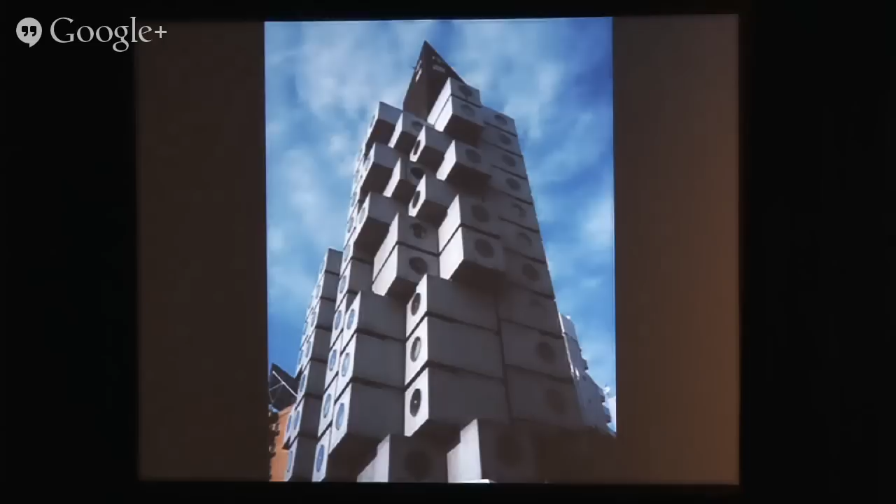Also in terms of design, this is the design of the 60s in Japan. It's very edgy - sense of gravity, sense of edge, sense of color, sense of material. This is one of the mainstream architectures in Japan now after such a long crisis. People in the world see this as a kind of exotic architecture, but I see it as part of the outcome of a long-term recession.

But because I was doomed to live with a downturn, I actually investigated a lot the potential of the post-crisis. In short, I did a lot of investigations at universities, and in short, when the economic indexes go down, instead the human feelings index goes up. So: planning, connecting, thinking, feeling.

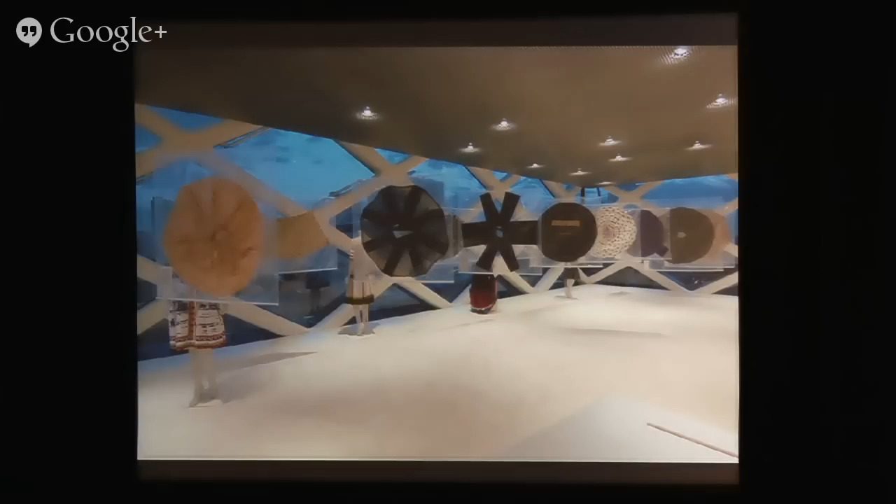For example, this is a group where we vacuum-packed the skirt, which has an interesting plan - a skirt you always see in elevation, but here it's in plan. Also, since it was a traveling exhibition, this vacuum-packed skirt could easily travel to the next venue.

These were the skirts that had a really three-dimensional cut or hard fabric, so they stood without any support. So we showed them as a kind of sculpture piece.

And this was showing the movement of the skirt with some kind of device - we used a ceiling fan motor to rotate the skirt in the building. Again, we used the mirror here to see the underside of the skirt and put the explanation of the skirt on the mirror, so you don't have to hesitate to look at the underside of the skirt, because you can read the text.

So this shows how it rotated - you can see that with different speeds and different heaviness of fabric, there is a different rotational speed.

We also use a car wiper motor on a battery, so it's not connected to any wire, and hang them on a skirt. This was a skirt that had an interesting sound when you wore it. People were wondering how it was moving, and without hesitation you could see by looking underside of the skirt. I have to say the entire team that did this exhibition design was all guys, so there were some pervert moments.

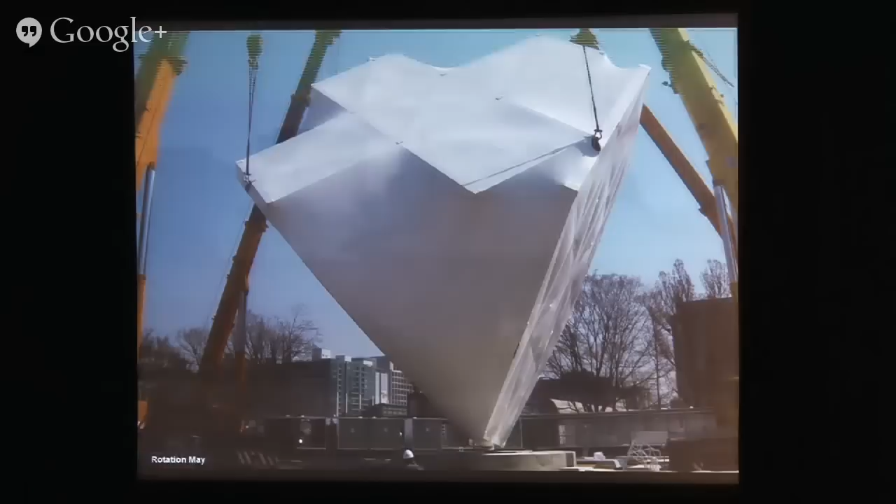Then we did this exhibition, a pavilion called Transformer in Seoul, South Korea, which consists of 4 different shapes put together into one triangular pyramid. It's a very complex shape connected by membrane that rotates each time the event changes.

Because this was the first exhibition and we wanted to communicate that in the future this object will rotate, and what you see as a wall and ceiling will become the floor, we decided to have these mannequins walking on those future surfaces like this. It's a simple idea which we thought was good, but of course to make that happen it was a huge deal to put them up.

So these are the scaffolding just to put them all up, and all the guys carrying legs, putting them one by one, mounting them onto the steel. It was supposed to be such an easy installation, but it became one of the biggest moments inside. It went overnight, of course. This was one of the most beautiful moments actually in the whole exhibition.

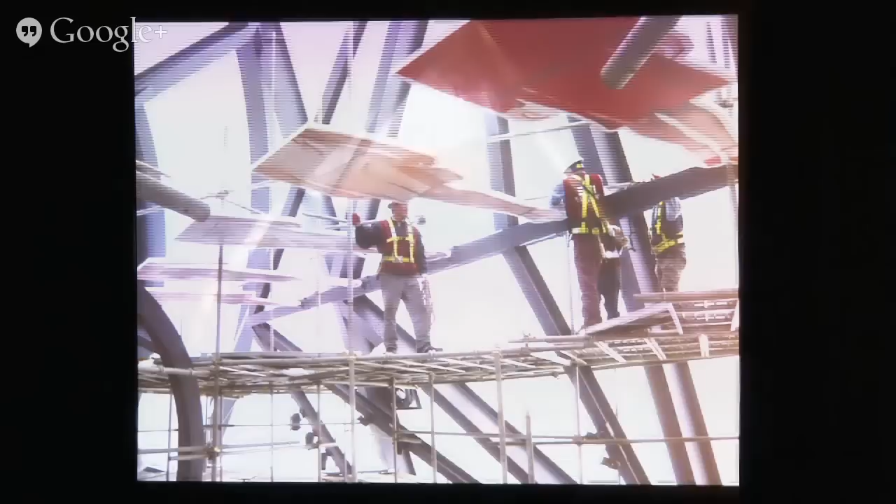We also do a lot of fashion related contributions, and one of which is also dealing with a denim brand, as you might know, Raleigh Denim, run by this very nice couple, probably younger than I am, though I never asked their age, definitely younger. It's quite important for architects, I think, to work with the same generation or younger, because in a bigger project you tend to always work with a much higher age, and you tend to forget what your generation is about.

It started through our collaborator Patrick Hopgood, who is also here, also from Raleigh, who knew them. They already had a shop in Raleigh, but wanted to open a store in New York. We went to their factory slash shop here in the factory district.

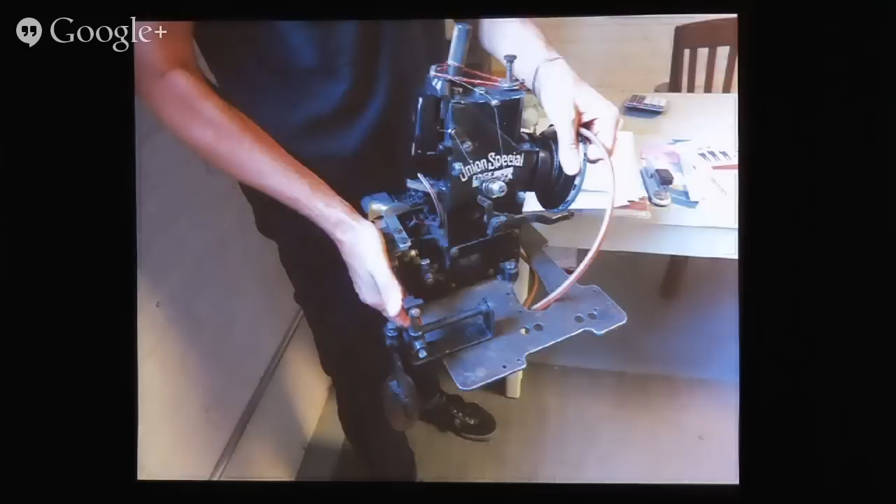They welcomed us with this kind of very subtle wall installation. This was the factory. As you might know, they use very authentic devices to sew. And this is their store, which was very charming. You could see that they are in constant change, thinking about every detail, every possible display as a communication. And this is their paper planes mounted on their ceiling.

What they wanted was a kind of hybrid of showroom in New York and also a store. And it's not just a denim store, it's also a curatorial store, so they also sell things that they like.

We thought the craft coming out of here was quite interesting, so we looked into the history of craft and how craft was always process based, and also always collective. We thought that the specialization of denim and the curation could be paired, and we had to compete against the typical denim store, which sells denim as the main foreground, and the curatorial shop, which is this kind of eclectic collection of displays. So we thought this workshop style and a Wunderkammer style could be merged, rightfully reflecting the culture of Raleigh and the location, which was in Nolita in New York.

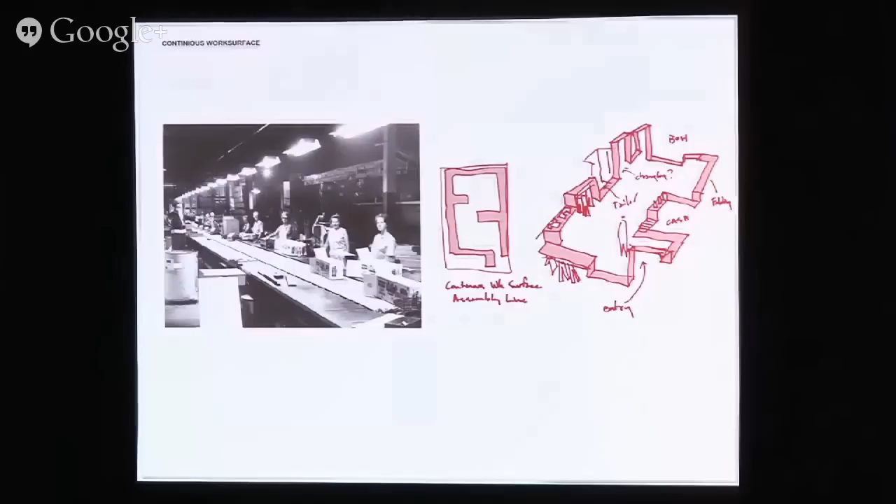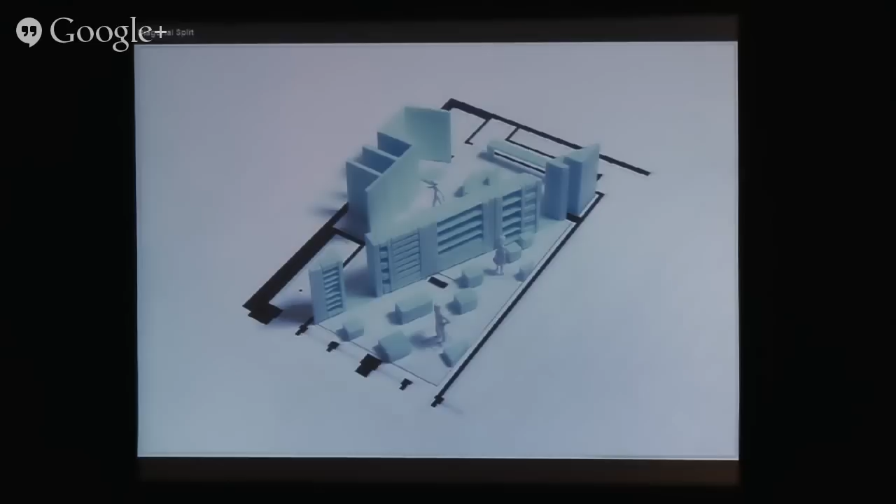I'll show you a couple of tests. This was like a continuous work table ribbon that creates a courtyard in the center. This was dividing the curatorial part and the denim part by a single wall.

This is literally dividing the open side, flexible side, and more defined side. This was dividing in a section, so in the front, the entire display is rising from 0 to higher, like a slope, and then in the front it's more flexible, and in the back it's more enclosed.

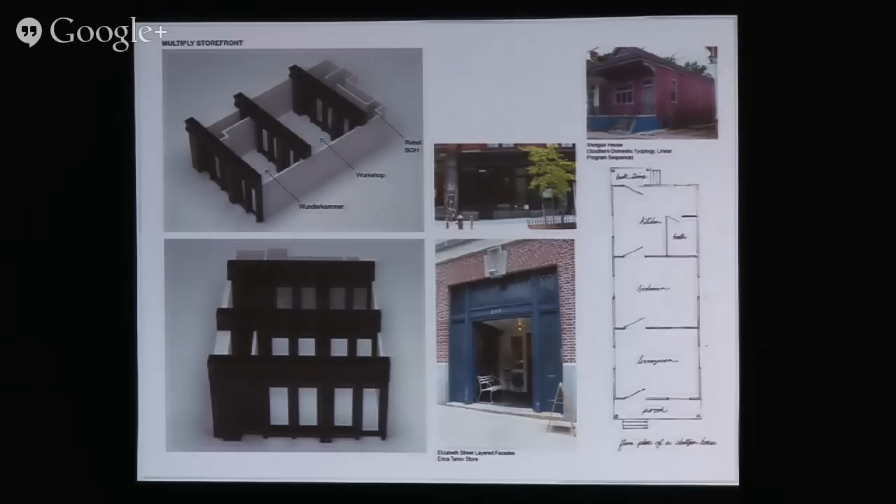We also thought that you can actually replicate the facade inside like 3 times, so that you don't know how long you are going into the store. So we did so many things, but which Patrick also worked on.

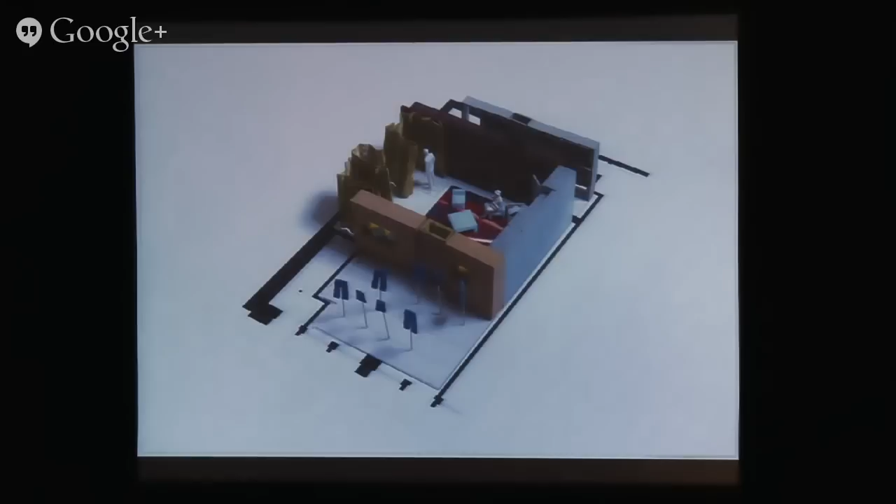And this was the kind of southern parlor room, which we thought could be an interesting feature. So it's not really a shop, but more like an entire store is a lounge, or the reception, like a hospitality lounge. So there's a hidden door behind the display that could open and be flexible for bigger events and so on. But ultimately, we chose the approach that we have been questioning on the fashion world.

So we thought this was strange that the density of the product actually represents the high end or low end. We thought that actually the most luxurious moment is that the owner can decide the density there and configure it themselves. So we started to think what can facilitate that kind of density change.

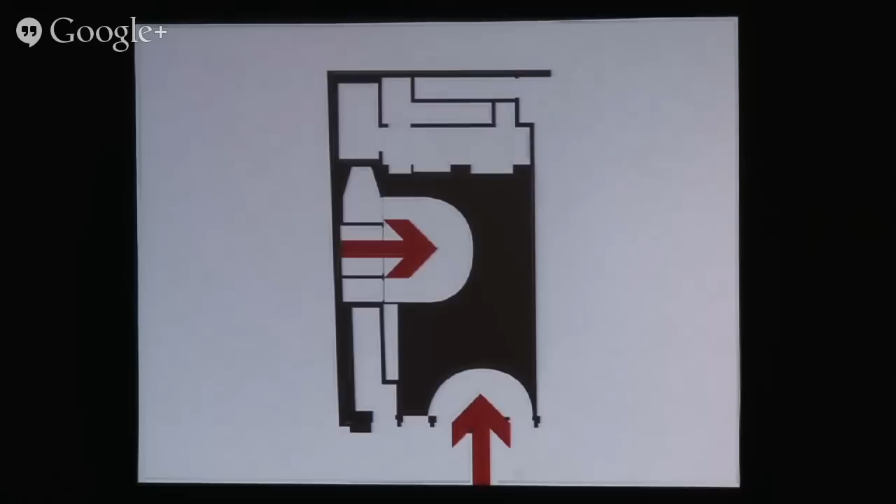And we immediately saw this kind of wireframe where you can actually have an armature that can carry many things, but also start to manipulate the transparency and density. So almost like an entire room filled with scaffolding. So what we did in the end is to create an entry hall, a parlor room, and a changing room in the back. And what you see as black is basically a wireframe space.

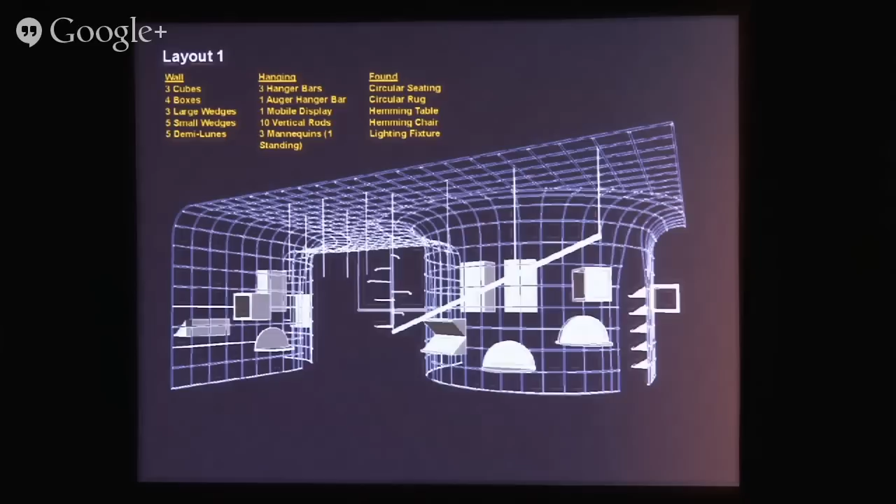Like this. So you see on the left is the entry hall, and on the right, the circular part is the parlor room. So you can hang many things, you can collect many things, and be completely flexible about the future.

You can have denim, basically clad the entire wireframe with denim, or you can have many different things, or you can create a wall, or you can do this kind of three-dimensional graffiti using the grid or media. So this was how it was finished. So you see the wireframe, and you see the product as the forefront of the room, not velvet cladding.

So everything is hung. And sometimes flexibility is a burden for lazy owners, and I understand that because I'm me too. But when we met Sarah and Victor, we thought we can rely on them to actually engage this potential and continuously change, because otherwise, providing flexibility could be in vain easily.

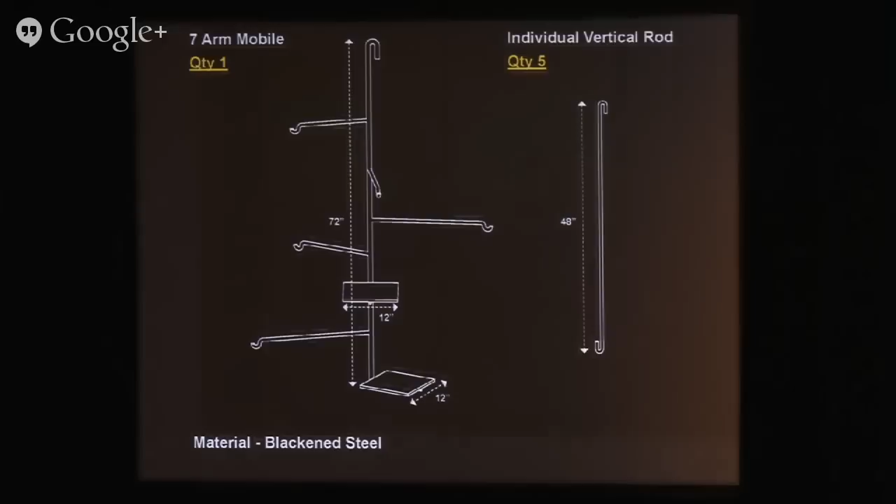So you can manipulate the density. You can sell only like 5 pairs of denim like this, or you can do the kind of family sale style like this. So we thought it was quite interesting to provide that possibility for the owner.

And as we predicted, they started to get bored with the first configuration. So they started to do something. This was the first attempt to actually close partially and create a kind of datum of opening.

I also think that at this level, architects are not any better than fashion people at actually designing the space. I think they have much better taste than architects. So we really wanted to create a space that is a complete collaboration, and we just provide the armature and they will just execute.

So they do many events still here, and they just changed recently again. So it's kind of working as we predicted. So these are the fashion projects, and now I would like to go into art. We do many art-related projects from institution to collaboration.

So for the first time, the museum became also a city museum, not just a park museum. What we did is to charge this moment where two entities are colliding, city and park, by basically peeling up the ground like this. You let the city come in and also the park continue and art extend at the same time. So it's not just the museum that's extending, all three entities extend at the same time.

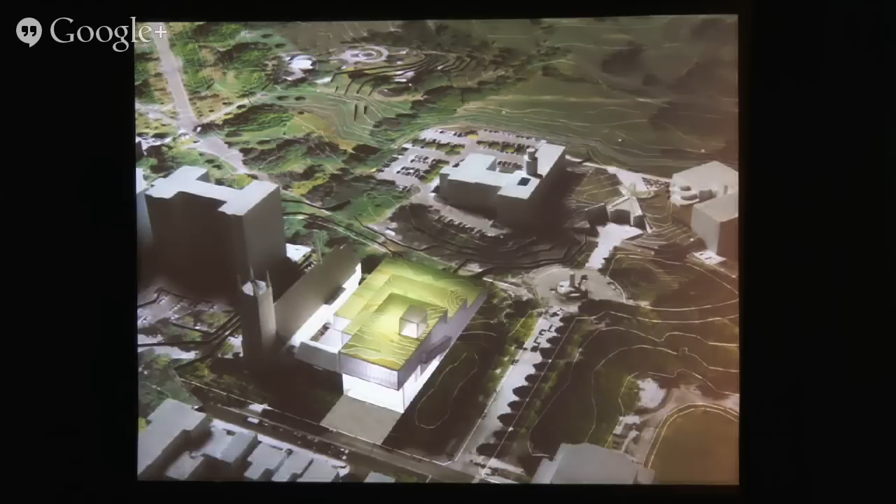So you can see that the topography of the park continues over the museum, and you see the city coming in and providing a big kind of entry hall for the entire museum complex.

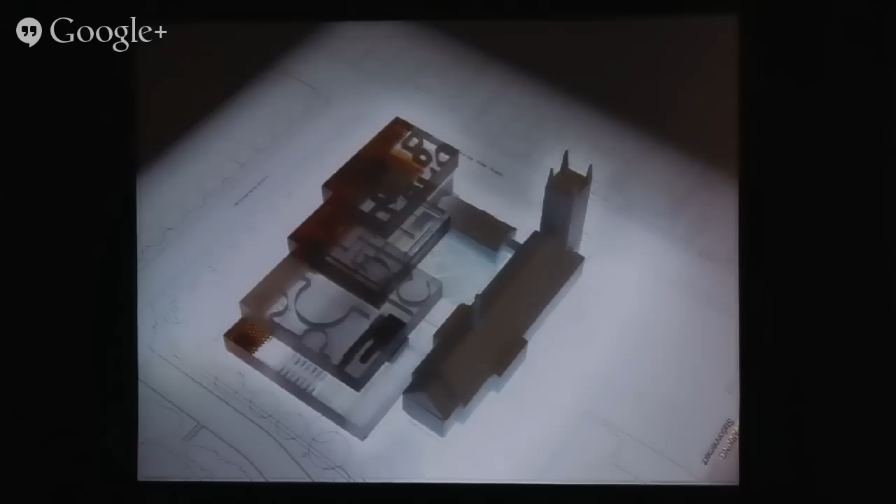The boxes are basically a straightforward translation of what they needed. It was next to the church, so it was stacked. From the city side, you see this kind of floating box. And this is a grand hall, which is a column-free space surrounded by many different programs.

In Canada, it's not entirely sustained by private donation like the US, so they have to raise their funds themselves. That means they often use the museum itself as a kind of event space to get the rent. So they organize so many different events on this level. It's almost like an event space with the museum on top.

So they do art events, or a wedding, or a performance, and so on.

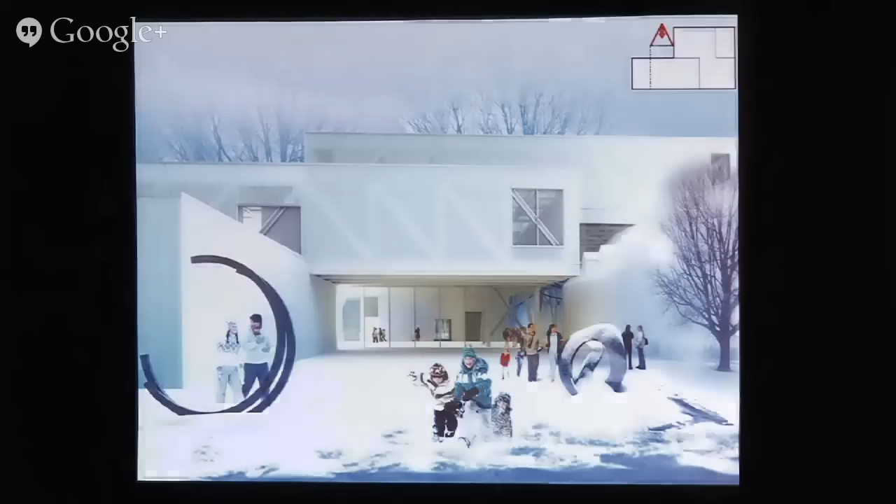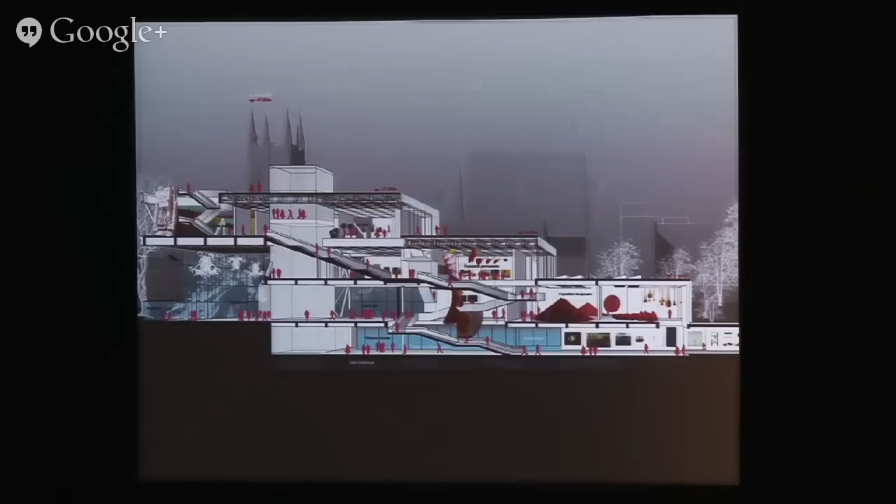The circulation is organized on the left side, basically justified, but it starts to inform the gallery spaces on your right. So this is a kind of circulation that goes over like 4 levels.

This is the basement with an auditorium, and then through this kind of atrium you go up, and then there's a stair. At one moment the stair goes outside because there's a nice park in front.

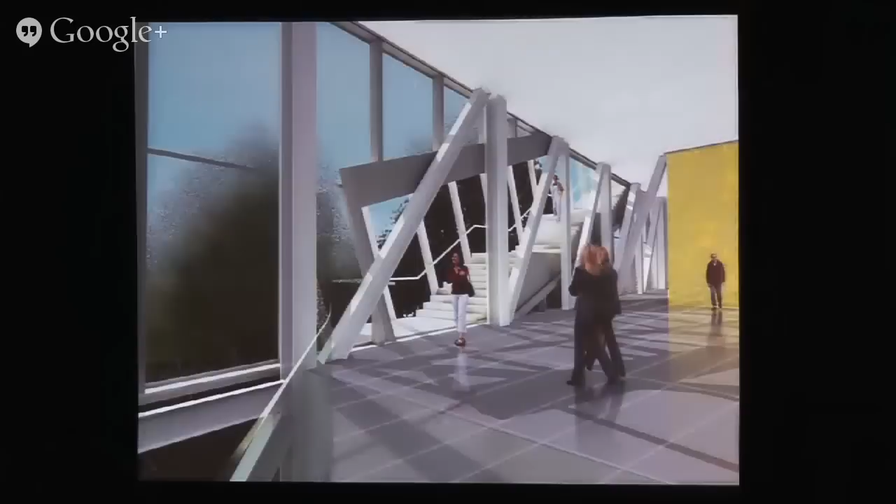And you're surrounded by trees. And then you go back into the museum. And then you frame sometimes the assets that are around the site.

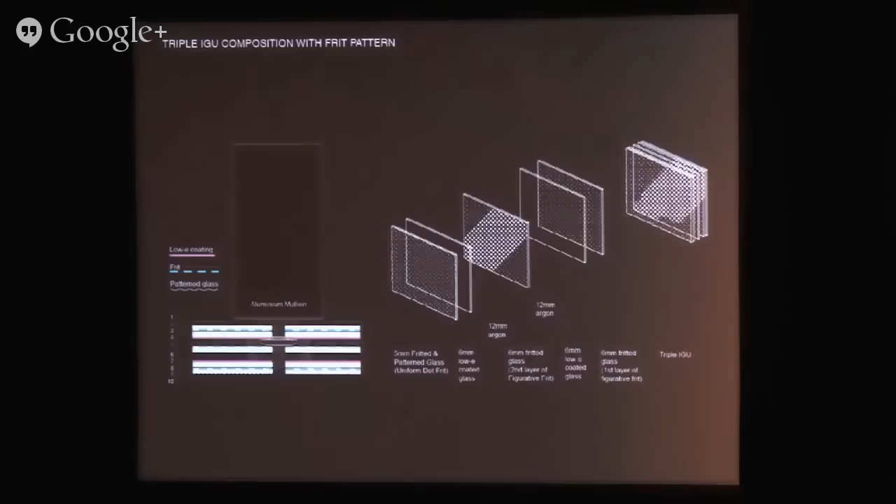The structure is a steel structure. The facade is triple glazing. As you know, it's a very cold climate, and we had to deal with the solar gain. So it's a fritting, a pattern that we applied along the structure, so you see vaguely the kind of blurred structure from outside.

Kanye actually thought one day, one morning, why isn't the cinema experience multiple screens, and it's all in one screen? So he wanted to shoot a film specially made for multiple screens, and he picked the number 7.

We liked that kind of very abrupt idea, so we took it very seriously and started to mock it up immediately. This is like, okay, what does it mean? Of course in architectural history and display history it's not the first time, but we thought it was interesting to hybridize this kind of actual cinema experience.

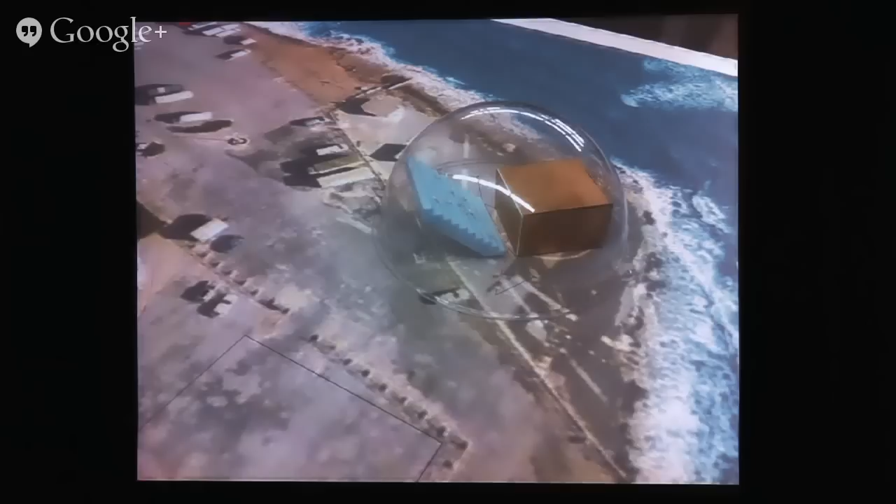We were also asked to design a pavilion. We thought it could be interesting that this screen can actually fold into a box, and then it starts to unfold and create 7 screens. Or we thought of immediate marketing, because it's Kanye, so it could look like this kind of UFO, an object, and then we can maybe sell it too.

But through this study, they quickly identified the first inauguration of this. It was really like 3 months away. So this was the Cannes Film Festival.

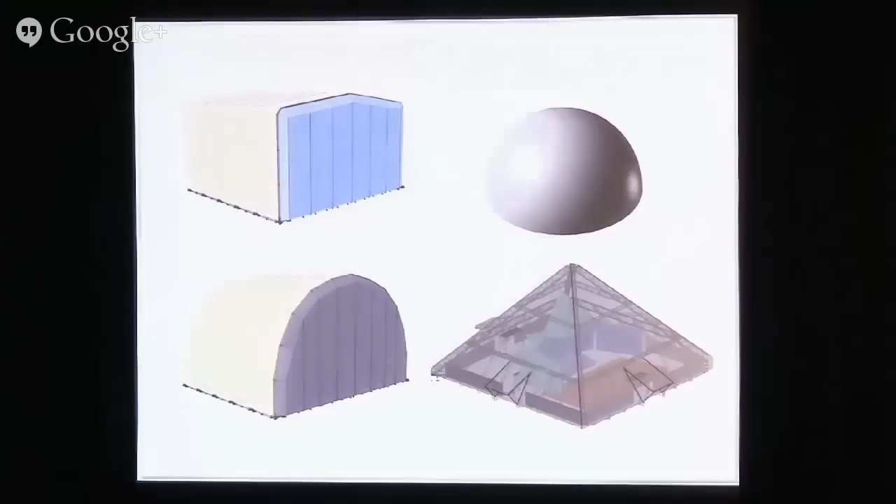Our site was quite far away from the main area, but it's at the tip of the peninsula next to an abandoned casino. Because it was rushed, we couldn't actually design a new pavilion. We had to deal with an existing tent that was already approved by the French government. So these were the 4 typologies we were given.

We immediately picked the pyramid, not just because of this picture, but Kanye actually has this kind of fetishism to Egyptian, or maybe not Egyptian, imagery - his label with Jay-Z has this kind of sign, which we thought was beautiful, so we thought we should just do the pyramid.

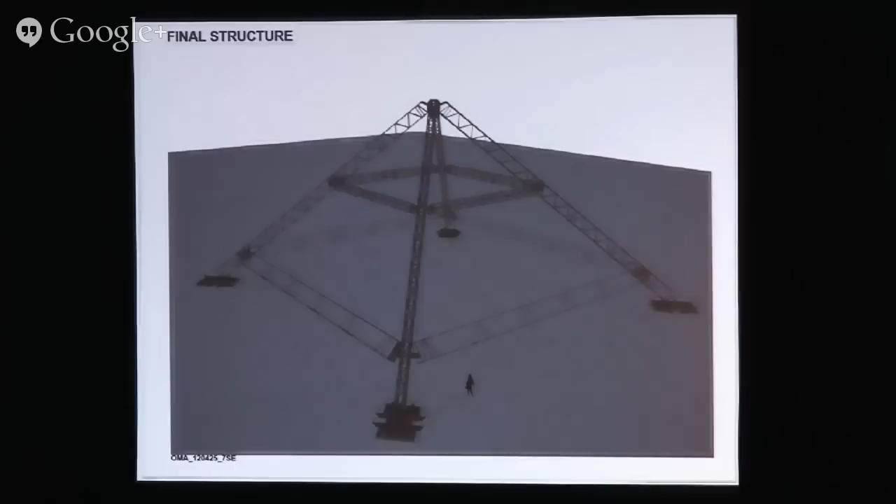Also, during the Cannes Film Festival, you have all this white generic tent everywhere doing events and drinks and parties. So we thought we could just modify that existing tent and disguise us also as a generic tent, but something different. So we cut out all the mini beams and made 4 big beams at the base, and hemmed up the entire tent as if the entire pyramid is floating.

And it carried all the necessary functions like projection and sound and so on out of that structure. We also wanted to have some kind of statement to Cannes. And Cannes, as you know, is increasingly becoming more about celebrities, not about film. So we extended the red carpet, not just outside.

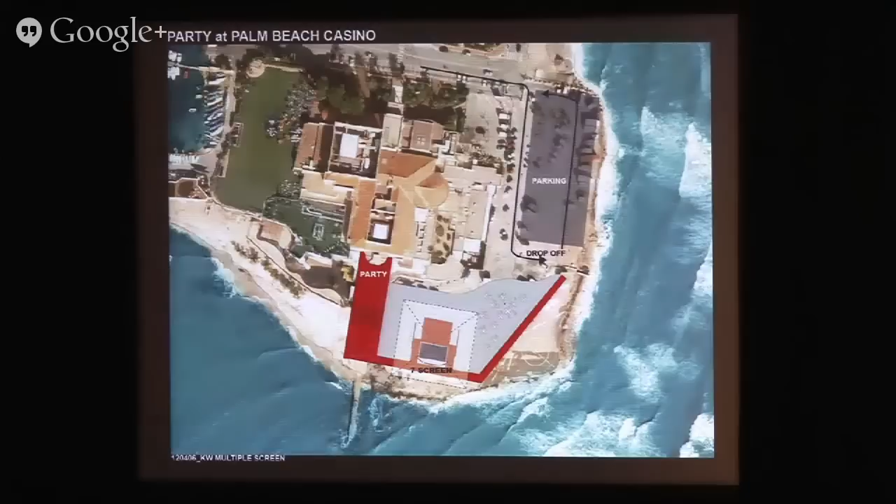We had the red carpet not just outside, but extended inside the building. And we had to construct a path so that they don't get bothered by paparazzi, because it was, of course, Kanye's event. So this was the final configuration, and we erected it. And this is how we hemmed it, with no beam, so it looks kind of floating.

And then because it was a red carpet, we used red light to enhance that redness. So the celebrities arrived. And as you might know, during this festival, there are like 10 of the most expensive boats parked out in the bay of Cannes. So this actually frames the bay of Cannes and those boats.

All the screens and necessary devices are hung, and this is to start. He basically directed a short film using 7 screens, used differently, but as you can imagine, it's the room - the bottom and the top capture the floor and the ceiling, and sometimes one is slow motion and one is actual speed. They used the 7 screens quite well. So this was the tent at the tip of the Cannes Bay.

There's another project we got during the recession, another kind of individual, also quite unique. He's Alan Faena, he's Argentinian. He also had a revelation, kind of a realization one morning, to buy this abandoned silo in the port of Buenos Aires and change it into a Philippe Starck hotel. He was a fashion designer, never a developer, so he convinced Philippe and the bank to pay for this.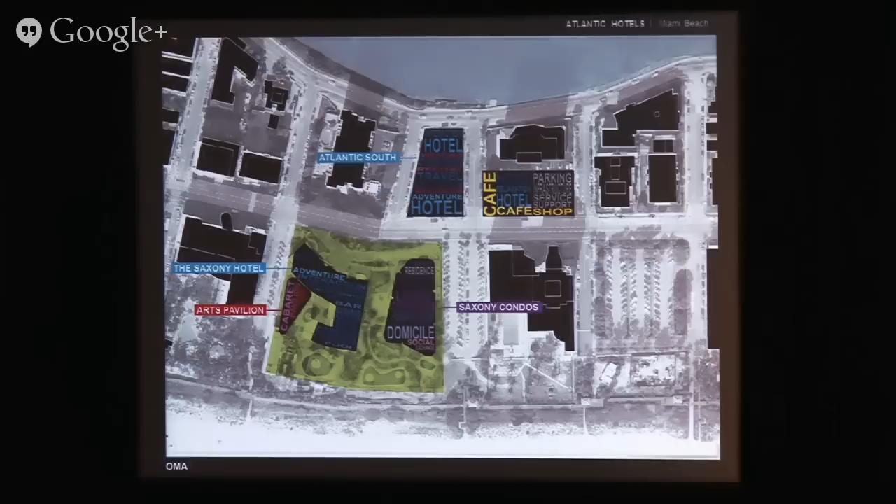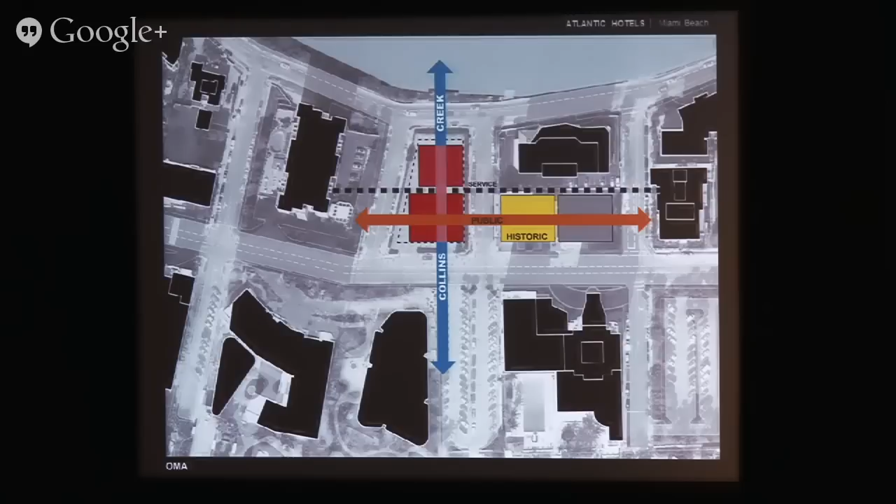Our art center is on the top side, where it says hotel. As you might know, in Miami Beach, across the Collins, as you get further away from the beach, it becomes much less activated. So we thought we had to brutally claim the centrality of the entire complex that he has. So we divided this main site into two different volumes, dealing with the Creek side and Collins side.

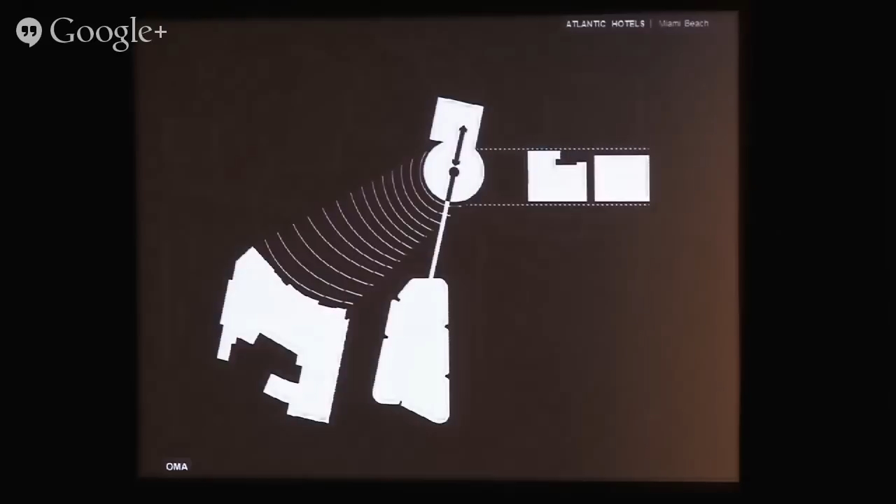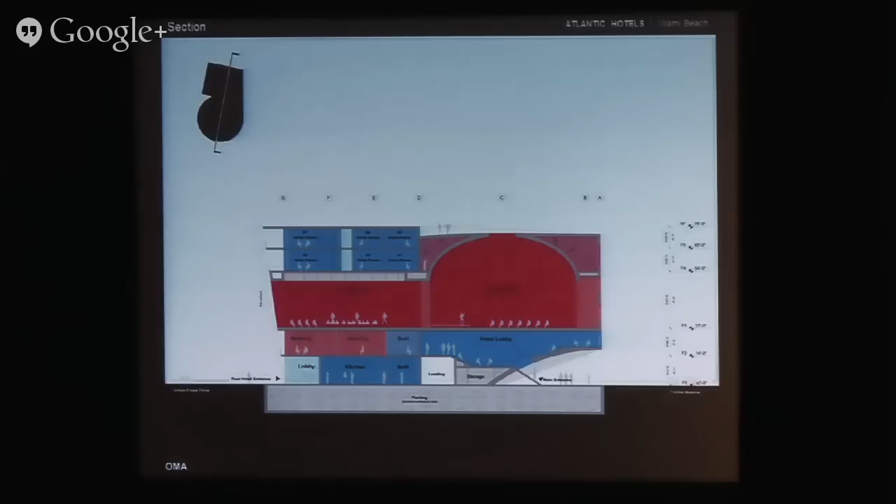So we retroactively claimed the center of the entire complex, which of course resonates with Miami style modernism. It's a combination of a cylinder and a cube attached together that looks like two different buildings, but it's actually one building. The cylinder has a domed space, and the cube has a black box. It's also a combination of classical style space and contemporary space attached together, used together like this.

Or it could be used separately like A and B. This is a model.

The arrival in Miami Beach is always quite a dramatic one, and you have to design it really well. So this is exterior space that is covered exterior space. We cut the cylinder to let the landscape come in deeper into the building, so the final shape was like this.

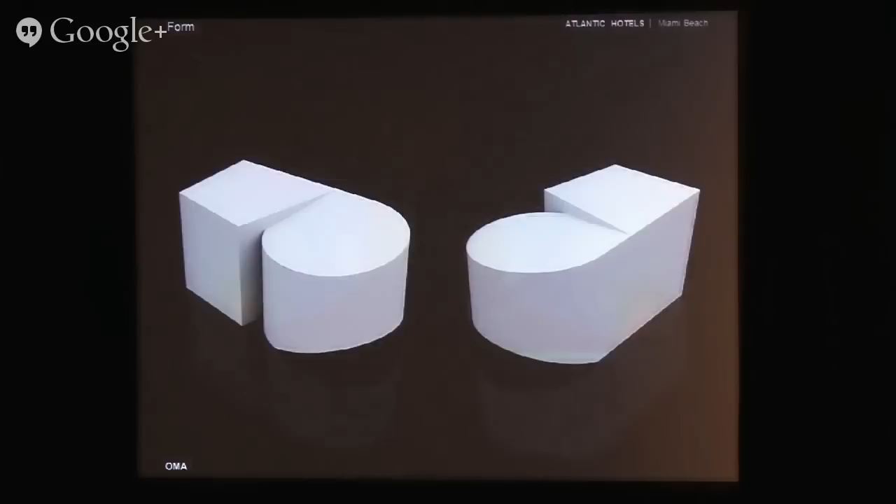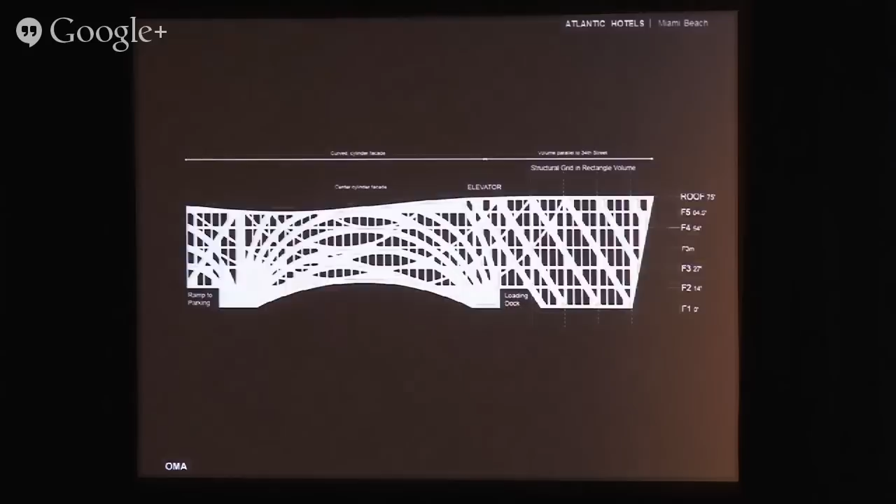One side looks like one volume, from the other side looks like two volumes. Because of this cantilevered space, we had to mobilize the skin. So this is a juxtaposition of different regulation and structural need that made this kind of palm tree-like skin that is structural to hold the entire volume.

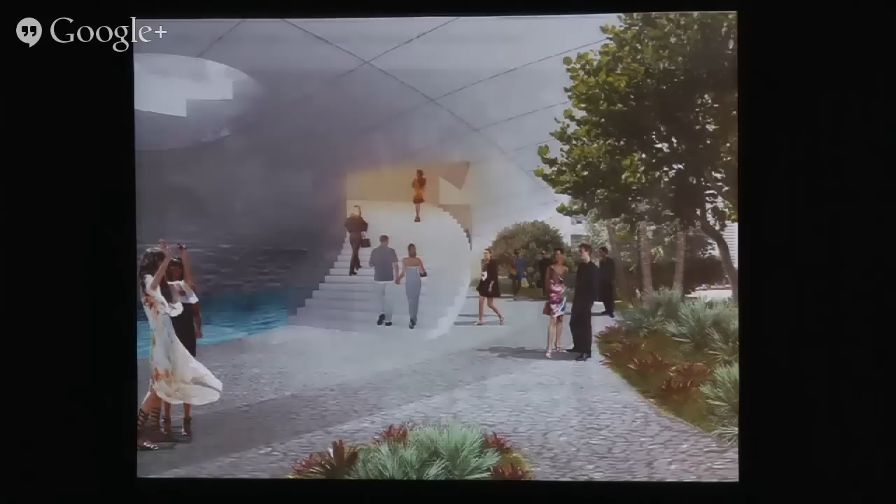Circulation around the cylinder is like a spiral. You enter from that covered exterior space, and then arrive to this kind of lobby where it could also be used as an event space. You go up, there's a dome space, which is also spiral, and you can do about 1,000 people event.

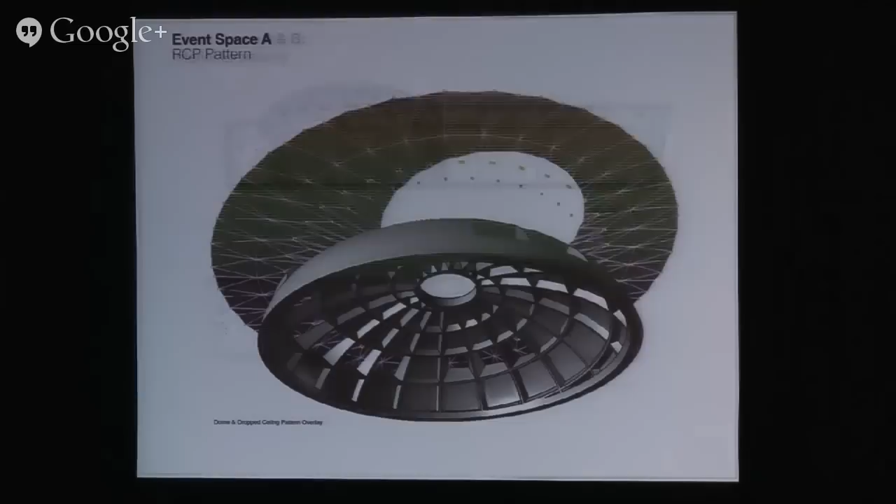And this is a black box site where you can actually have a big window to look to the creek, but you can also black out. The dome is also structural, and you have an acoustic plate above it, which you see in red. So you can actually have balconies looking down to the events.

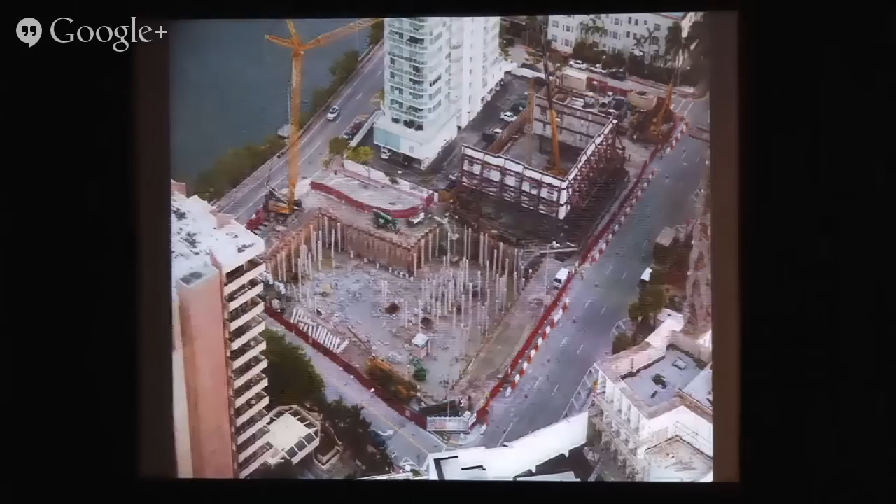We also did insertion of a courtyard in an existing protected hotel next door, and then the mechanical parking where the car elevators are exposed, so you can see the movement of the cars. This is the current state - the site is excavated and the water is out, so the construction is starting.

She lived in front of everyone in the gallery, and as you might know, this one in MoMA, she just stared at people the entire day for 3 months. She just did the show in Serpentine, London. She wanted to make a venue that preserves the long duration of performance.

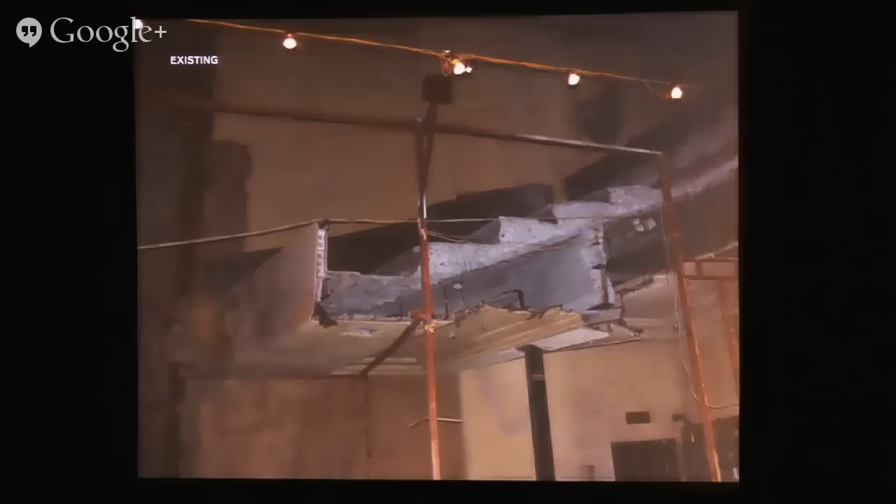The site was in Hudson, upstate New York. It was a community center before, but they poured concrete to make an indoor tennis court. You can see the line of the tennis court - it was a kind of brutal operation. They had the balcony from the community theater, but they cut the balcony in the shape of a tennis court. It's amazing how sports can override culture.

So we reinserted a flexible space, almost as big as a tennis court. Then all these kinds of events could happen inside the building, but it has to be over 6 hours. That's the rule. So we designed, of course, flexible flat space, but it has to be over 6 hours.

Out of this kind of constraint, we thought we could respond in 3 different manners through architecture. In such a long duration of performance, you can't really fully engage with the performance for the entire duration. So this is her performance in Guggenheim, but there's always a kind of second ring that is what you call audience 2, which is not fully engaged, but semi-engaged with the performance.

Which we thought was kind of similar to a baseball game. As you know, baseball is, of course, exciting, but it could be horribly boring. So the current trend is that you have this kind of open concourse - you have concessions, but you are not detached from the field, you stay connected, or you can actually do something else while you're watching the game.

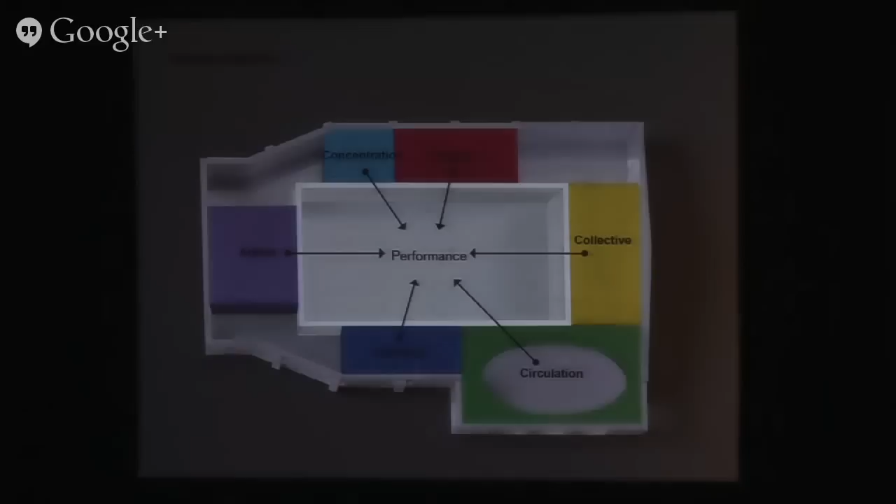So the typical case in a performance space is that lobby and performance is detached, like a binary system. But we thought long duration performance space, dedicated space, should be somewhat blurred. So we arrayed all the different functions around the performance space so that you can actually do something else while you're observing the performance, or you're semi-engaged doing something else.

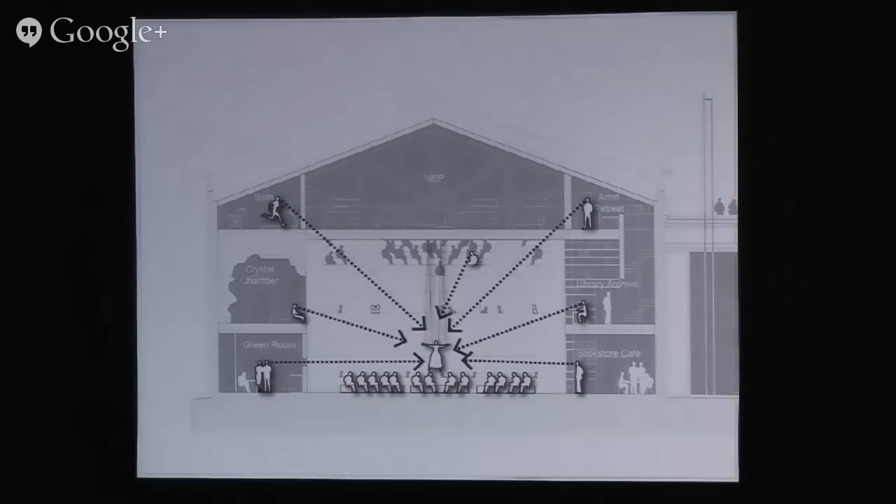So the audience 2 is basically a second ring surrounding the performance space. So while you're reading, while you're in a cafe, while you're in the gym, while you're anywhere in the library, you can actually look down to the performance space.

Another interesting thing was that she developed a method called the Abramović Method. Typically, performers train themselves for a performance, but in a long duration performance, she thought the audience should also be trained because it's so long. So she developed a series of meditations that trains people to deal with boredom and with the long duration. What's unique is that she gives a certificate of official audience for the long duration performance after this training.

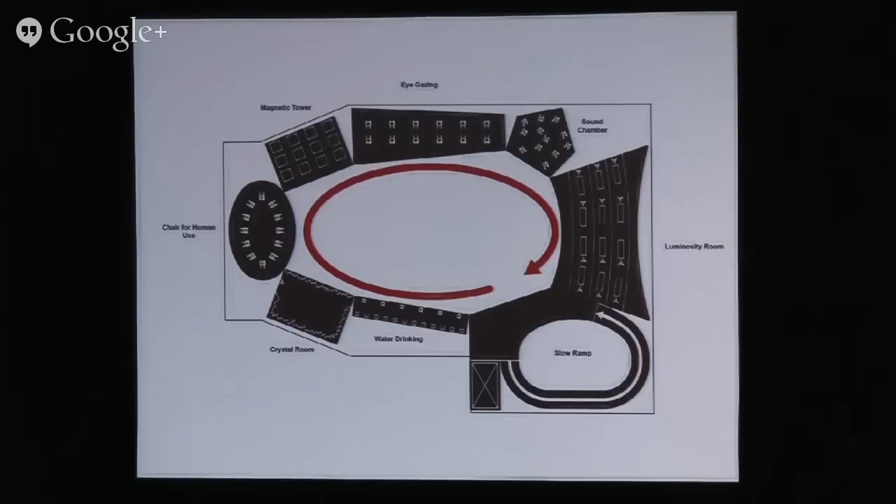So we made different training rooms on one level. You start from a point, and it's a loop—by the time you come back to the same place, you get certified as an audience member. Your phone gets confiscated, you get lab coats, and you meditate in the crystal room. We designed all these different rooms for meditation.

Eye gazing—what's interesting about this method is that, as you see in this picture, these people in lab coats are trying to be an audience. But what happens is there are a lot of people who are actually observing the audience, or the audience trying to become a certified audience. So there's a second tier of audience observing an audience as performer. Typically in any theater, everyone looks at the performer, but in this theater you no longer know who's the performer and who's the audience, which we thought was interesting. So we also designed windows that let people observe each other.

The third one is a chair. This is a chair she used for the MoMA show. Because she couldn't stand up, the toilet was embedded in the chair. In a long duration performance, of course, you can't use a typical chair, so we designed a special chair.

Dealing with long duration, there are different ways to approach it. This is the typical way that happens in our office quite often—like the space station, the medical bed, or an airplane. But we thought it was interesting how she hybridizes training and working.

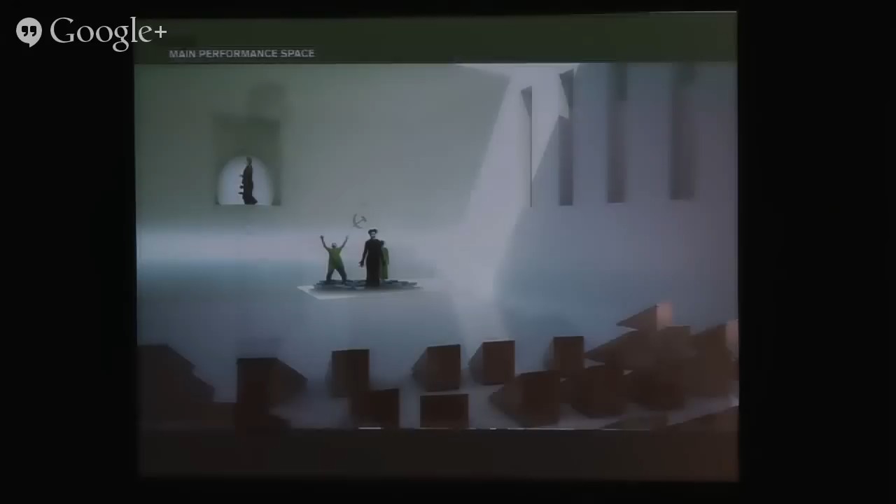So in the end, we decided to combine mobility with comfort. She thought being able to move while on the chair is quite a luxury, so we designed this kind of wedge shape. It doesn't look comfortable at all, but inside it's actually comfortable—it's a movable chair at the same time. She liked it because it looks like coffins, so while someone is sleeping, it looks like they're in a coffin. Well, that's what she said.

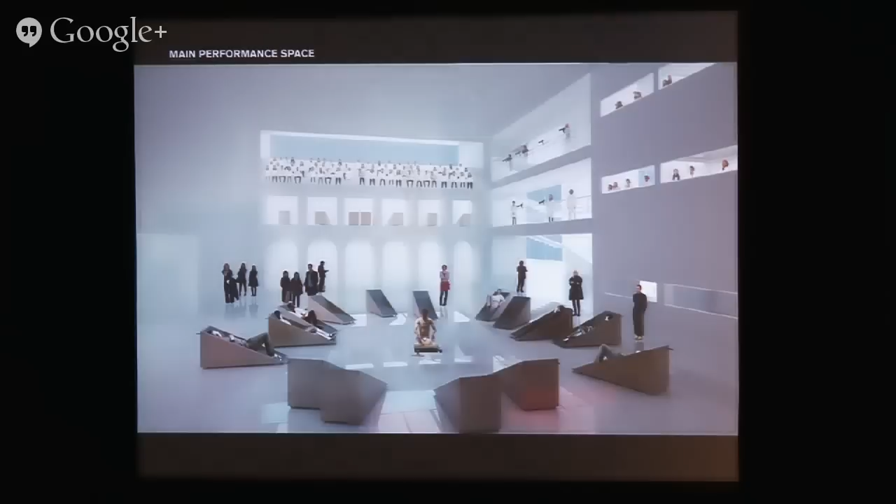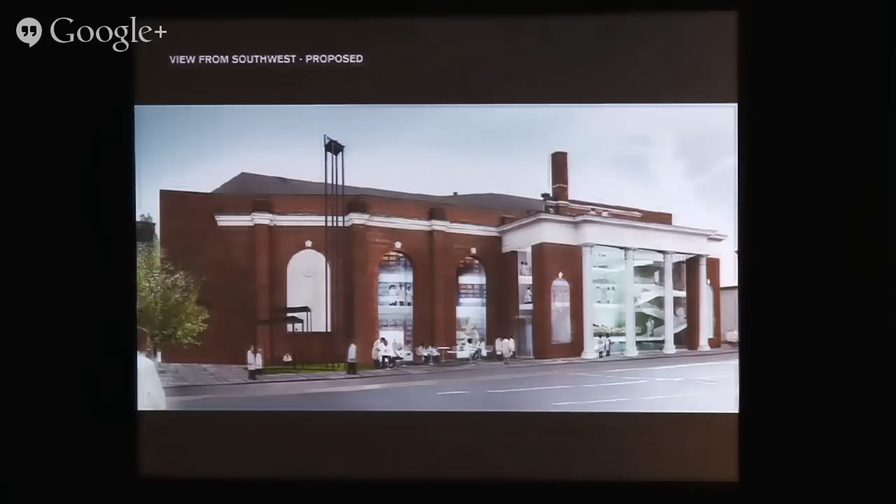She thinks sleeping is a very strong reaction to the performance, so she doesn't accuse people of sleeping—she actually embraces it. She wants her staff to roll out people who are sleeping into a different chamber so they can have an even further relaxed sleep. That's also coming—it's an existing building that is going to be converted.

This is a model we made that you can put your face inside—you're inside the model to observe those different windows. That became a kind of icon. This was used in a campaign to raise money, at PS1 in MoMA. We used this model as a centerpiece, and everyone took a shot of it without showing their head. I was recently covered in Icon magazine, and they didn't use my face, but they used this photo.

So lastly, I'll go through this quickly. We are doing many mixed-use buildings, and we think mixed use is becoming kind of generic. Mixed use has actually been a great typology—for example, in the Downtown Athletic Club, as Rem Koolhaas has said. But now it's overused, we think. It's becoming a generic typology.

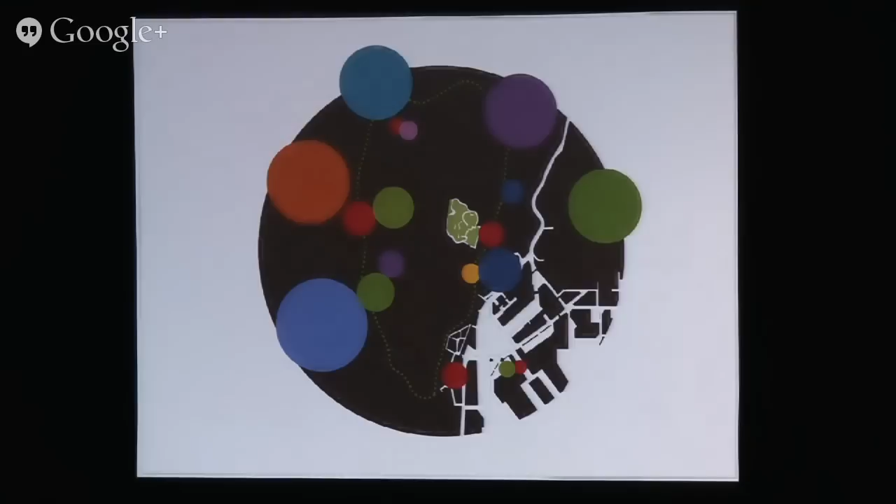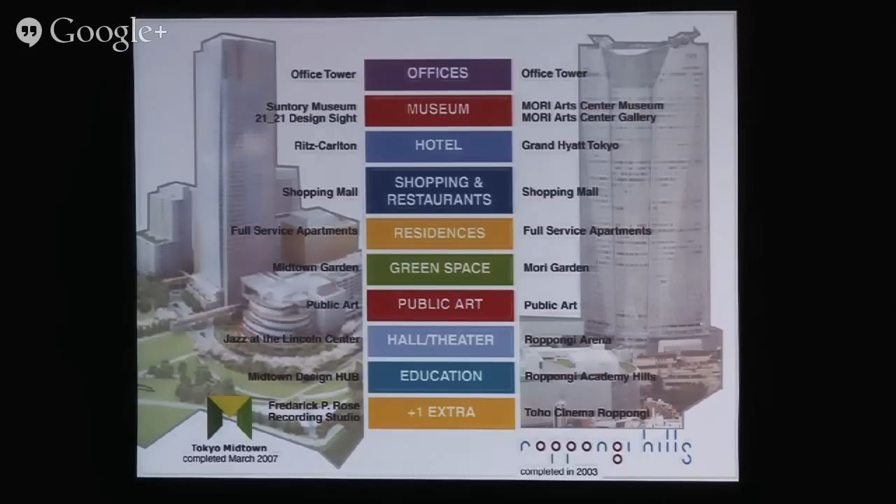For example, this is the city of Tokyo—the different colors represent different regions, different characters in the city, big enough to house different characters. If you compare that to a meal, it's like an a la carte style meal where you share things—it stimulates conversation. But nowadays, there's a lot of prepackaged program for different commercial uses. These are two main tower developments that happened in Tokyo that have the exact same program.

We compare that to a kind of bento box—a prepackaged program that's replicated over and over again. What used to be interesting and conversation-stimulating became predictable, and that extends to the city. No matter how architects try to change this with facade design or shape, what's inside is basically repeated, so it's becoming more and more generic. That's not just Tokyo, it's replicated everywhere.

I'll skip ahead, but I want to show you one project in Jersey City. As an architect, we still have to design mixed-use buildings. This is a project we did with Patrick.

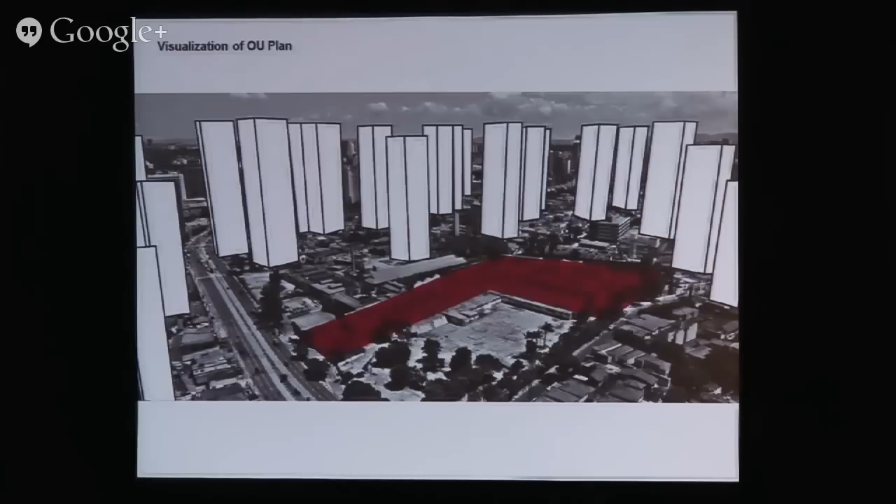This is in Sao Paulo, a very vertical city. The site was L-shaped, with Walmart on one side and an art school on the other. The site had projected towers like this, as it was a new central business district. We argued that maybe we shouldn't do generic towers, but instead horizontally extrude those programs and stack them like a screen.

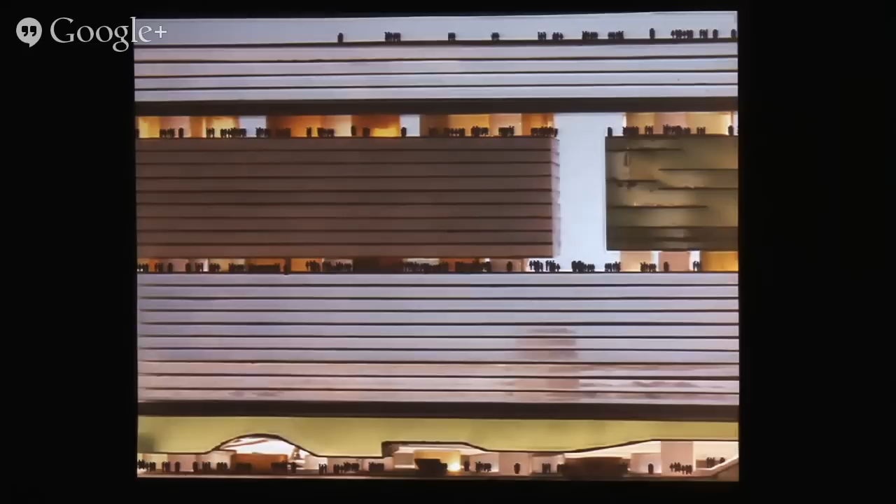This shields the art school from Walmart, but at different levels we have sky lobbies—we wanted a very Brazilian style, casual but also semi-open. The program includes hotel, museum, and office.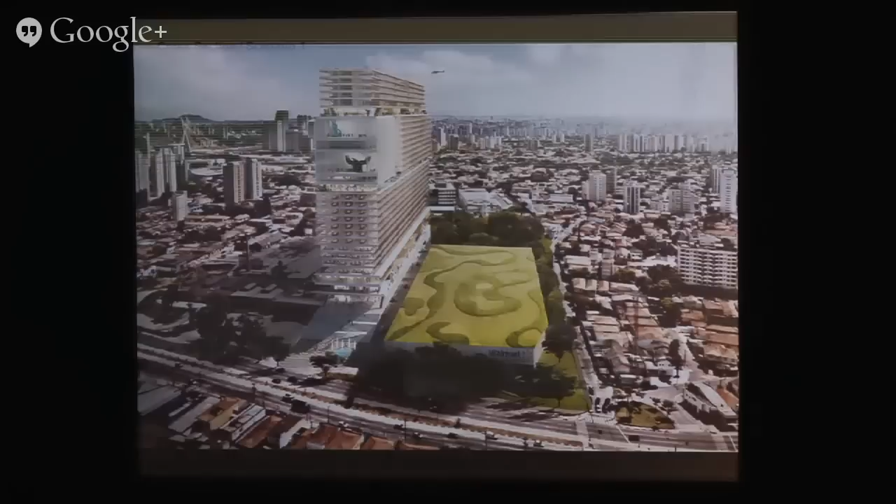At different widths, we convinced Walmart to at least green their roof, and on the left you see the art school. But you see the impact of the wall.

How radical that is compared to the towers—it's more or less the same size as Niemeyer's famous Copan, but straight. The office portion is extremely generic and efficient.

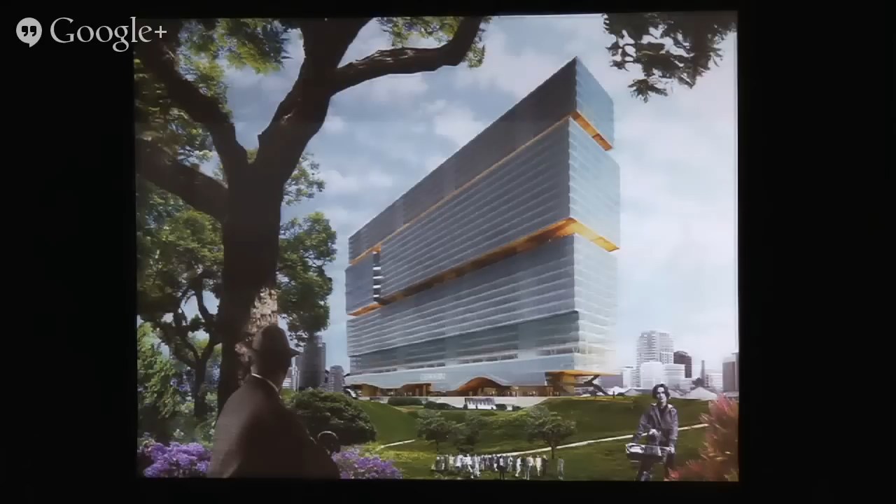But in these sky lobbies, it's a very open and landscaped level.

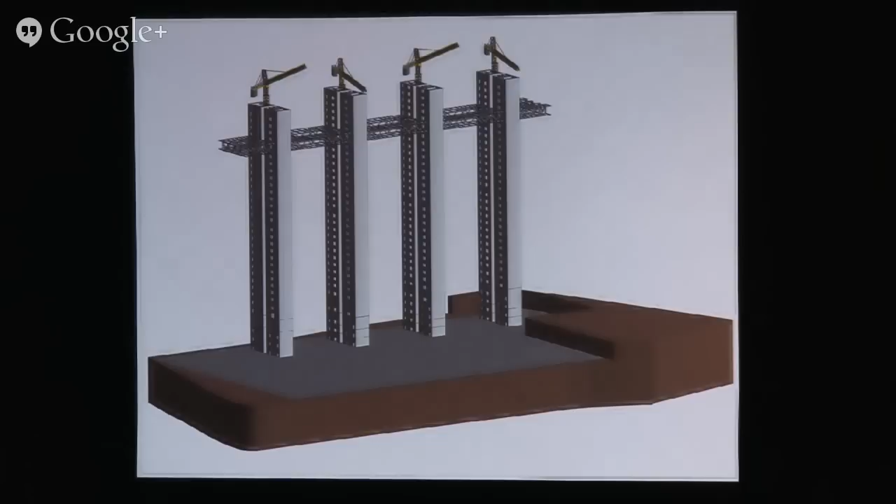Because of Walmart and the art school next door, the site is quite constrained, so we're erecting the cores first, then putting cranes on top and building from the top down. That will save construction time.

Lastly, a lot of people think an architect's dream is height, but I have a different theory—an architect's actual egoistic dream is a wall, not a tower. These are different futurist or irresponsible architects' projections in the past, these wall cities.

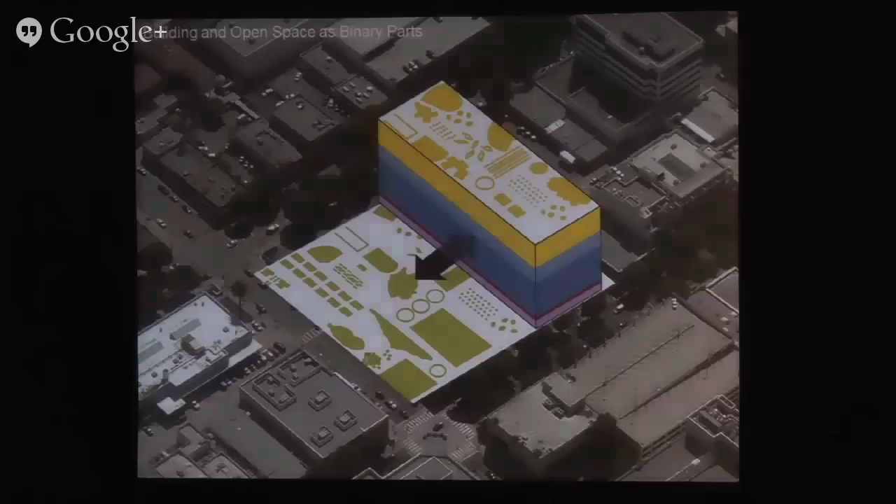Lastly, we're doing a project in Santa Monica, also a mixed-use building, where the building and landscape go hand in hand—there's always a garden in front, a public space in front of each program.

This is the Hanging Gardens of Babylon—not the Tower of Babel, but a monument of land made for his wife. So we said this is not a height building, but for land.

It's an unhinged program with distinct parks in front. I want to end with this animation.

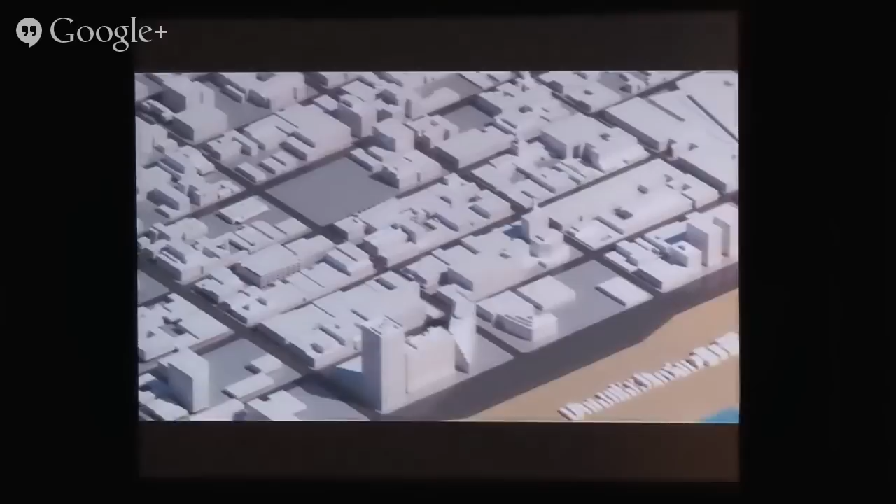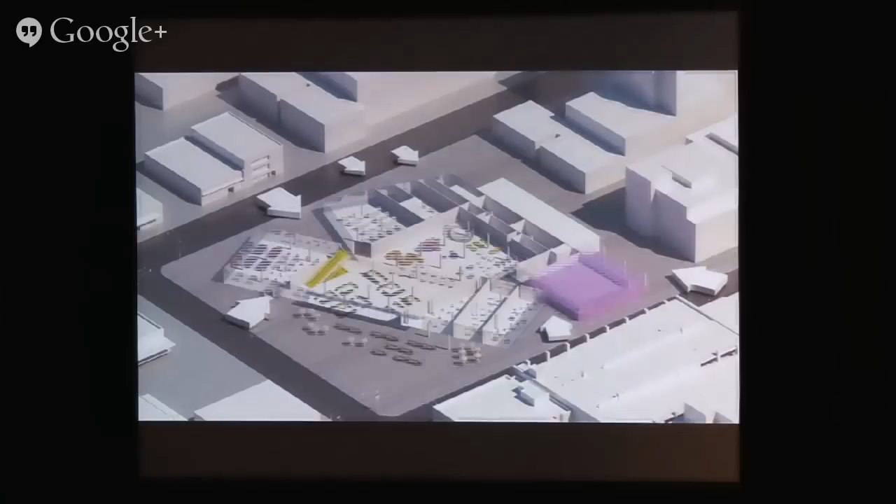On the ground level, there's a plaza that houses a farmers market and so on. In the center, there's a cultural program, because in a commercial building the perimeter is very important but the center is actually redundant—so we put the cultural building in the heart of the commercial building.

From every bar, you can go up to the next program through atriums and mini buildings inside, embedded as a hinge at every hinge of the program.

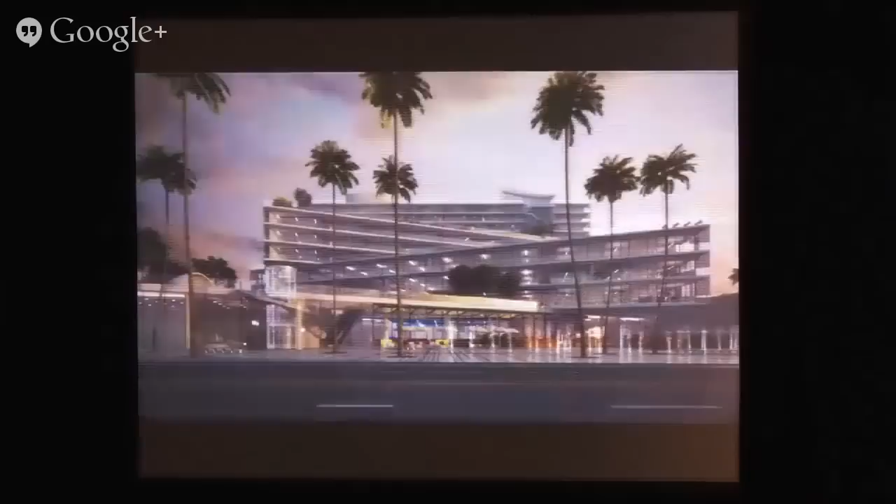This is the main plaza on the street, close to Third Street Promenade, just two blocks away. We're hoping to create another destination next to that very linear public space.

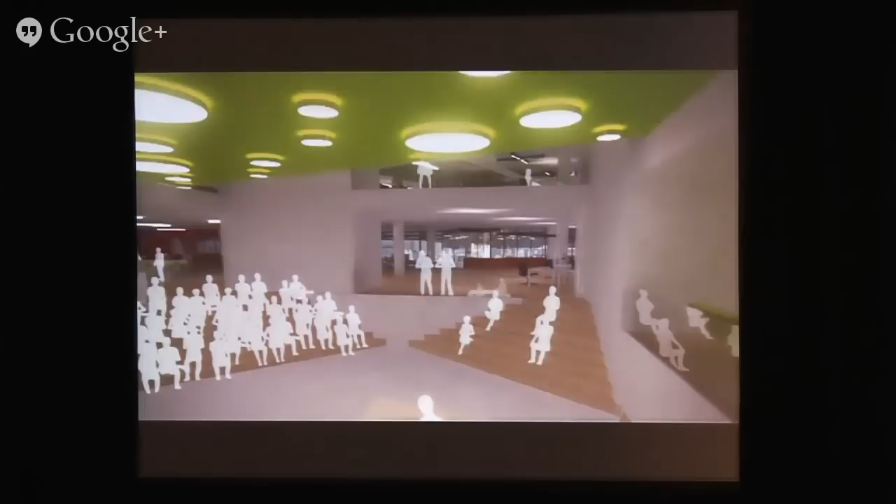This is a collective area for the office. There are a lot of tech companies moving to the beach at the moment in LA, so there is huge demand for large floor plates.

In Santa Monica, more than half the time you don't need air conditioning, and the temperature inside and outside is more or less the same, so the relationship between inside and outside is quite strong. This roof is a reflecting pool, but at the tip it's a pool for the hotel.